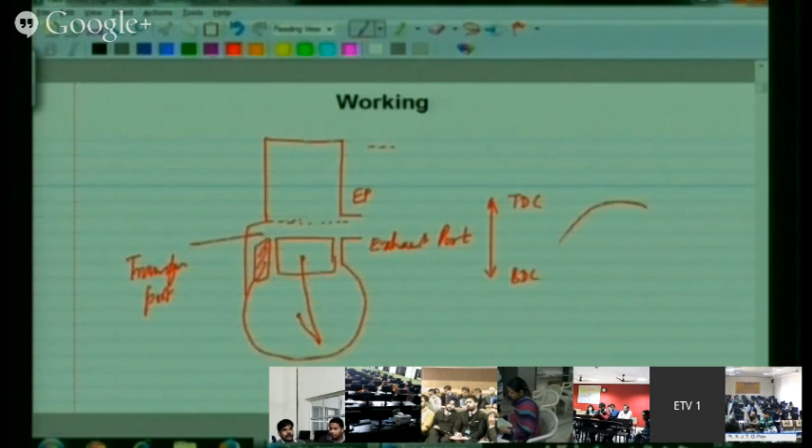Then the piston comes down. It first opens the exhaust port. So if I were to draw the port timing diagram of this engine, if this is top dead center and this is bottom dead center,

When the piston comes down, it first opens the exhaust port. We call it EPO. So as the piston comes down, it first opens this exhaust port. Then after some time, it opens the transfer port. We call this TPO.

And then symmetrically, it first closes the transfer port and then closes the exhaust port. EPC and TPC are exhaust port closure and transfer port closure. So this is the sequence of events that you see in a two-stroke engine.

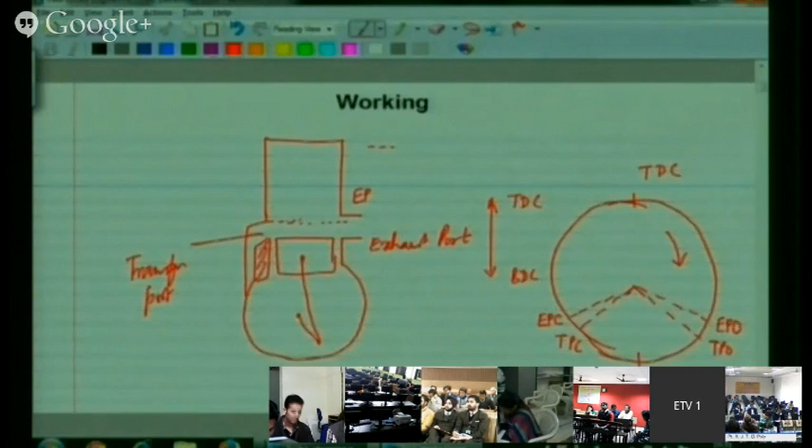So when the piston moves down from top dead center to bottom dead center, you have hot gases pushing the piston down under pressure. The piston moves down, first it opens the exhaust port. And the moment it opens the exhaust port, the exhaust gases rush out, and we call this the blow down process. So exhaust gases rush out of the cylinder and the pressure falls.

And meanwhile, if you look at what is happening in the crankcase, the pressure of the crankcase is going up because the piston is just compressing whatever is there in the crankcase.

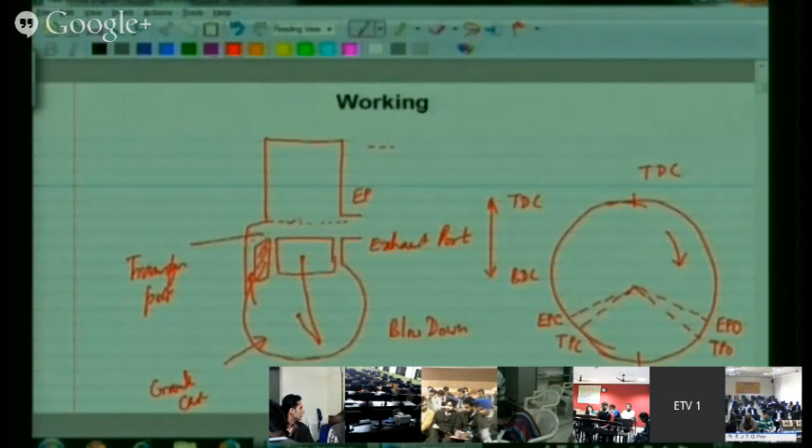And after some time, when the piston moves down beyond the transfer port's topmost point, you find that the transfer port opens. When the transfer port opens, the compressed fresh charge, which was taken earlier, is pushed into the cylinder through this passage, and the exhaust gases are also leaving out through the exhaust port.

So we have what is called a loop formed in the cylinder, the fresh charge coming like this, and the exhaust gases going like this. The fresh charge comes like this from the crankcase, pushing the exhaust gases out, and we call this process the scavenging process.

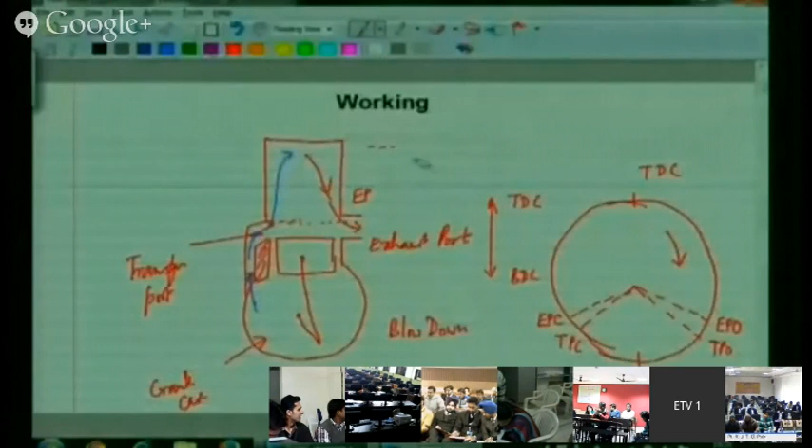So scavenging is basically removing the exhaust from the cylinder and filling the cylinder with fresh fuel air mixture. Now the fresh fuel air mixture comes from the atmosphere.

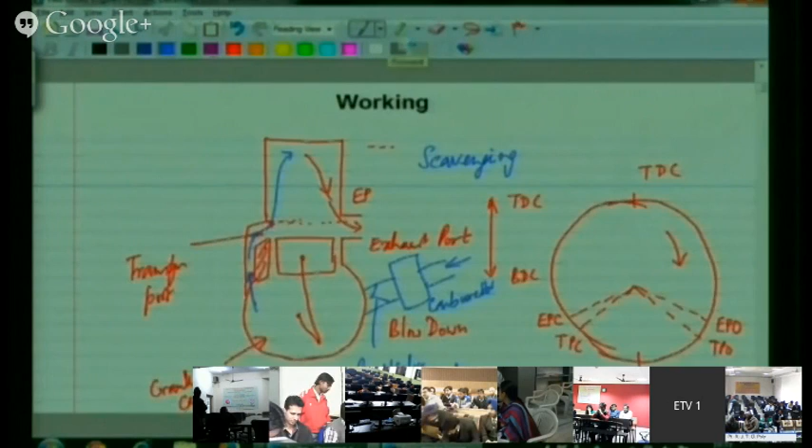Of course, you have what is called a reed valve or a one-way valve, which is supposed to allow the fresh charge from the atmosphere into the crankcase. And you may have a carburetor here, and air comes from the atmosphere, fuel also comes here, and air and fuel get into the crankcase through this reed valve. Reed valve is one method of allowing the fresh fuel air mixture into the crankcase.

So now let me repeat: when the piston moves up, the pressure at the bottom of the piston drops. So fresh fuel air mixture comes from the atmosphere through this reed valve, and then picks up fuel from the carburetor and enters into the crankcase. And meanwhile, on top of the piston, you have compression of the gases being done. The piston reaches top dead center, there's a spark on top, and combustion occurs in the regular way.

Then piston moves down, the exhaust port opens first, and we have what is called blow down, which occurs first. Then the transfer port opens and the fresh charge comes inside and pushes the exhaust out. This process is called scavenging. Meanwhile, as the piston is moving out, we are taking fresh fuel air mixture through the carburetor once again. So this cycle keeps on repeating.

And if you look at this portion where the exhaust port is open and the transfer port is not yet open, this we call the blow down process. And this we also call exhaust lead. That is, the exhaust port actually leads the transfer port.

But what really happens at the end of the process is that the exhaust port closes after the transfer port closes. This is a problem. The exhaust port need not close after the transfer port closes. In fact, the exhaust port ideally should close even before the transfer port closes, because if it closes after the transfer port closes, whatever has been taken into the cylinder has a chance of going out of the cylinder, and short circuiting will be more.

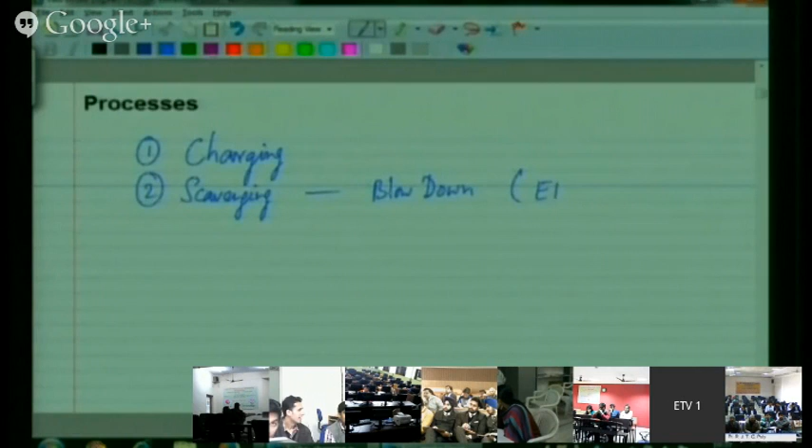So basically, the processes that we have seen in the two-stroke engine are charging, that is taking the fresh fuel air mixture into the crankcase. Then we have scavenging, and scavenging is composed of blowdown, where the exhaust rushes out between the exhaust port opening point and transfer port opening point.

And then you have the fresh mixture intake into the cylinder when the transfer port opens to transfer port closes, and this fresh mixture is pushing the exhaust out.

And then you also have what is called as the combustion taking place on the top of the piston. The pressure goes up and then the piston is pushed down. So these are the main processes that occur in the two-stroke engine.

This charging occurs into the crankcase, and the scavenging occurs in the cylinder. So, and we also saw that this charging is through the crankcase, so it is not very complete. We'll see very soon. And the scavenging is the one which leads to problems like short circuiting

and charge dilution. So these are the main problems, and these problems lead to high hydrocarbon emissions because short circuiting is fuel, and brake thermal efficiency is low, hydrocarbon emissions are high, and this charge dilution we'll see very soon will lead to rich mixtures. We'll need rich mixtures, and rich mixtures means the carbon monoxide emissions also will be high.

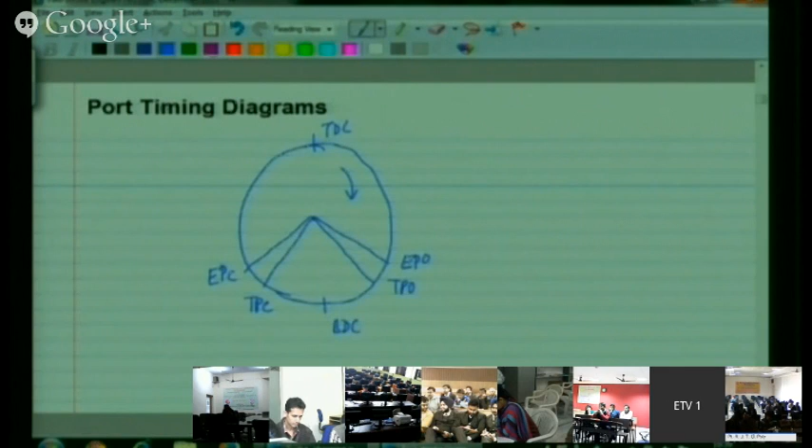And the port timing diagrams we saw already. I'll just repeat it once again. We have the exhaust port opening which opens first, then we have the transfer port which opens next, and symmetrically transfer port closes first and exhaust port closes next. If this is and this is top dead center, and this is bottom dead center.

So this is what we saw as a port timing diagram, and this we saw as the exhaust lead. And the exhaust lead is important because during the exhaust lead, the hot exhaust at high pressure from the cylinder has to go out and allow the fresh charge to come inside. So during the exhaust lead, the pressure in the cylinder has to fall from the cylinder pressure to the crankcase pressure.

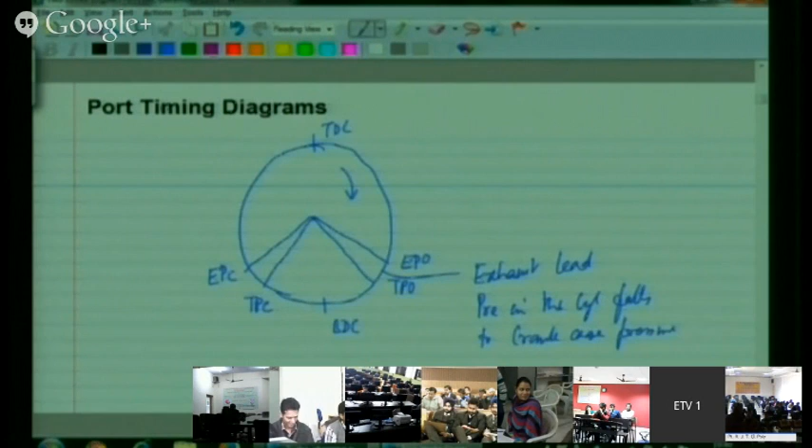So exhaust lead has to be given, and during this time the pressure in the cylinder falls to the crankcase pressure. So this has to happen. So if we need time for this, and this time is given by the exhaust lead. But this exhaust lead means that you are closing the exhaust port later than the transfer port, you get problems of short circuiting because of that. So these are the inherent problems in a two-stroke engine.

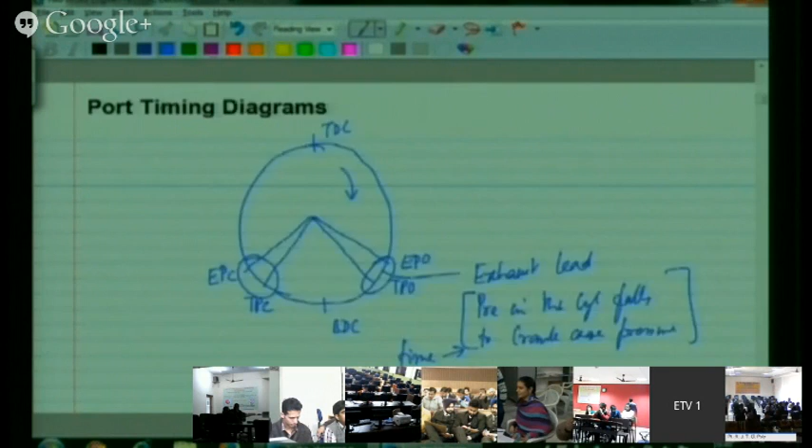Now coming to the charge in the two-stroke engine, if you look at the charge in the cylinder in the two-stroke engine, it will be composed of fresh air plus fuel. It will also be composed of the retained exhaust, and this is what we call as charge dilution. And this retained exhaust does not allow the fresh charge to burn well, and you're forced to use rich mixtures. So normally in a two-stroke engine, we are forced to use rich mixtures.

We are forced to use rich mixtures, and these rich mixtures also lead to CO emissions.

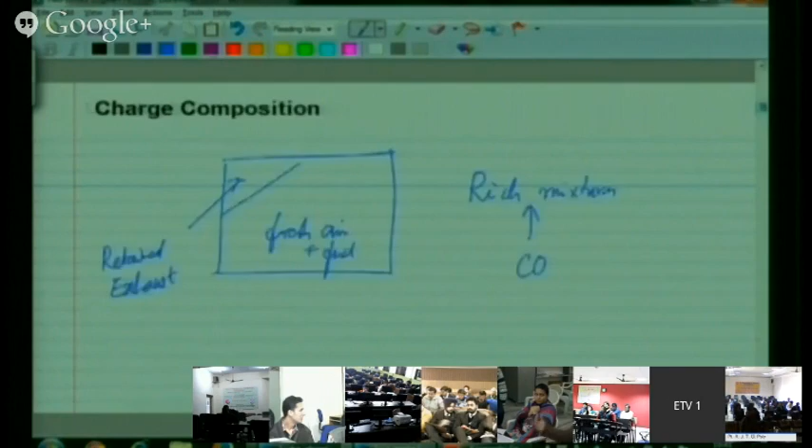Now coming to the lubrication of the two-stroke engine. We know in a four-stroke engine we can always put lubricating oil in the crankcase, and it will stay there. In the two-stroke engine, however, air coming from the atmosphere gets into the crankcase and then into the cylinder, so you cannot put lubricating oil in the crankcase. So we need other methods of lubricating the engine.

So we use what is called petroil lubrication, which means we mix the lubricating oil with the petrol which goes into the cylinder. We mix it in a particular fraction, something like 1 to 2% of the amount of fuel. So 1 to 2% of the fuel would be oil, mixed with the fuel and taken along with air and fuel into the cylinder. This fuel will get into the crankcase, touch all the moving parts of the engine, also go into the cylinder, touch the moving parts, and lubricate them.

And then this lubricant will be lost - so it is lost lubrication. So another problem with the two-stroke engine would be high lubricating oil consumption, and also emissions and deposits because of this lubricating oil.

So people have tried to reduce this problem by making use of oil injection. They don't mix the oil and petrol together in the same proportion. Instead there is a small oil pump which injects the required amount of oil into the air stream, and this small amount of oil goes into the cylinder and lubricates different parts. The advantage is that the oil to fuel ratio is not fixed here - it is varied depending on the operating condition. So this is a better system, uses lesser oil, and has brought down emission levels.

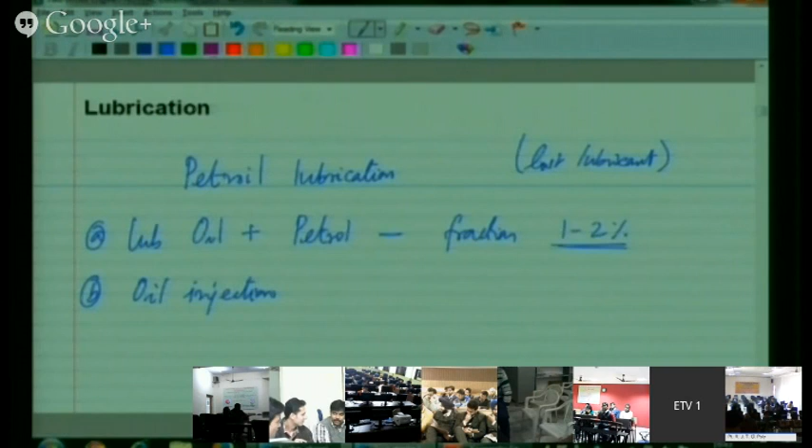Now we'll move on to the next thing, which is the PV diagram of a two-stroke engine. I'll try to link the PV diagram to the port timing diagram, so I'm drawing the port timing diagram at a slightly different angle here.

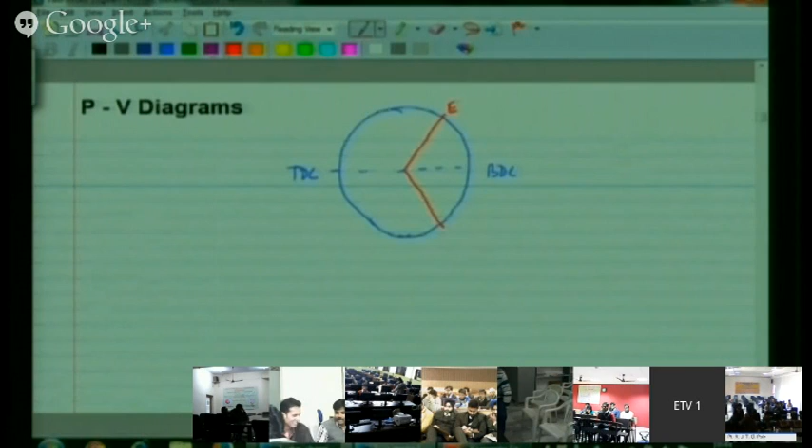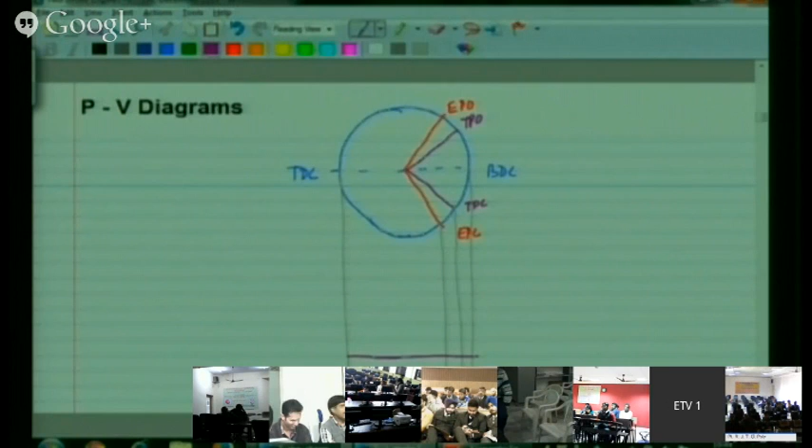This is top dead center, this is bottom dead center, and this is the exhaust port opening and exhaust port closing, and this is the transfer port opening and transfer port closing. And I'll just bring all this down.

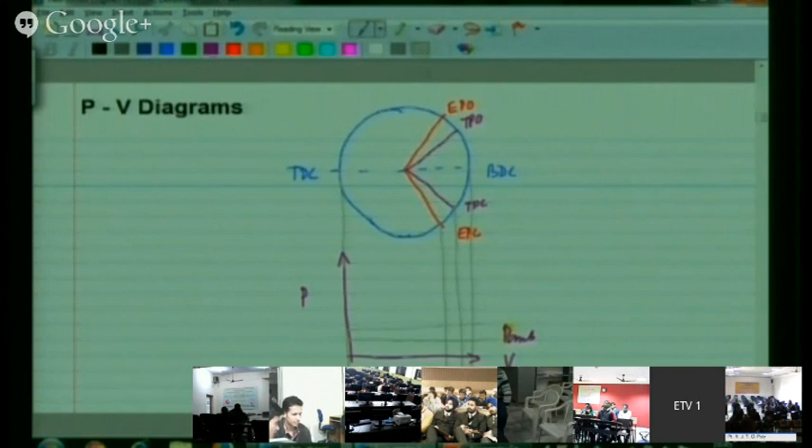So the x-axis represents volume and the y-axis is pressure. The TDC to BDC difference is actually the volume, and I'll try to plot the pressure changes. Here I'll show that this pressure is ambient pressure, and the pressure in the crankcase is actually slightly above ambient pressure. I'll call it PCC, the crankcase pressure.

Normally what happens is compression starts from a pressure which is slightly above the crankcase pressure, because the cylinder is likely to be filled at crankcase pressure. But it doesn't happen so, because the cylinder is actually exposed to the atmosphere during the start of the compression process, since the exhaust port is open.

So I'll just trace what happens as we come from the expansion process. Let us say we have started expanding from a high pressure - this is the expansion process after combustion. At this point, the exhaust port opens, and the moment it opens, we see what is called a blowdown.

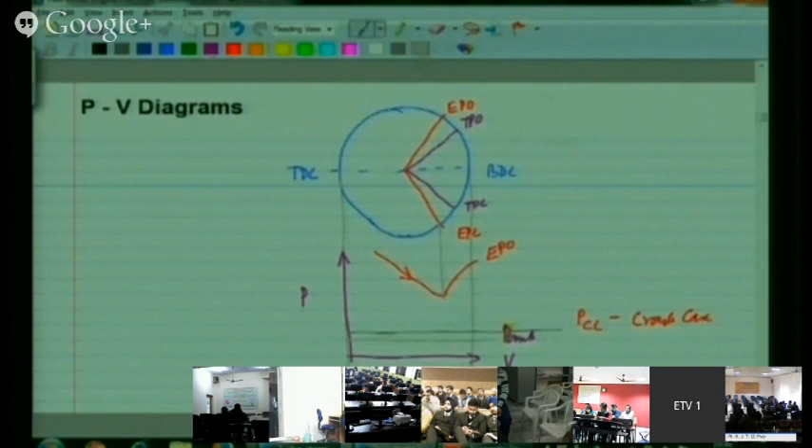So pressure significantly drops, and in fact we want this pressure to actually drop to the crankcase pressure, because unless it drops to the crankcase pressure we will not be able to open the transfer port. So we want this pressure to drop from here to the crankcase pressure, which is here - this is the pressure of the crankcase. So this process is called blowdown.

So the moment the exhaust port opens, there's a drop in pressure, and after this point the transfer port opens. Ideally when the transfer port opens, the pressure should be at least equal to the crankcase pressure or lower. After that, the pressure gradually falls down to nearly ambient pressure, because the exhaust port and transfer port are open.

So then the compression process starts from here, and till the exhaust port is closed, compression may not start at all, because you're still exposing the gases to the atmosphere. Compression ideally starts only after the exhaust port is closed.

So this becomes the compression process, and then you have combustion, and then you have your expansion. This point is exhaust port closing, this point is transfer port closing.

The point I want to make here is, when the exhaust port is about to open, the pressure in the cylinder is considerably higher than atmospheric. The moment the exhaust port opens, there is a sudden drop in pressure due to blowdown, down to crankcase pressure, and we want the pressure to fall to the crankcase pressure when the transfer port is about to open. After the transfer port opens, there is a further drop in pressure because the ports are exposed to the atmosphere. Ultimately at BDC we nearly reach atmospheric pressure.

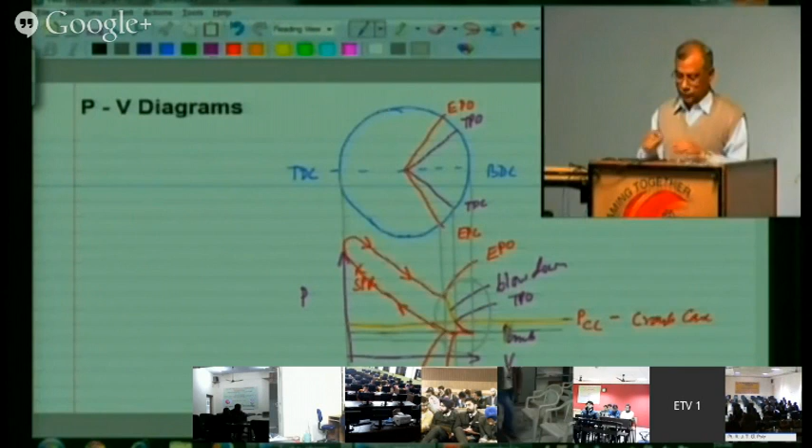There is some loss in power. This also means there is a loss in work, because you are forced to open the exhaust port earlier. This is typical of a two-stroke engine.

The other point to note is, you should give sufficient time between exhaust port opening and transfer port opening, so that the pressure in the cylinder at the point where the transfer port opens is equal to or lesser than the crankcase pressure. Otherwise the fresh charge will not flow from the crankcase.

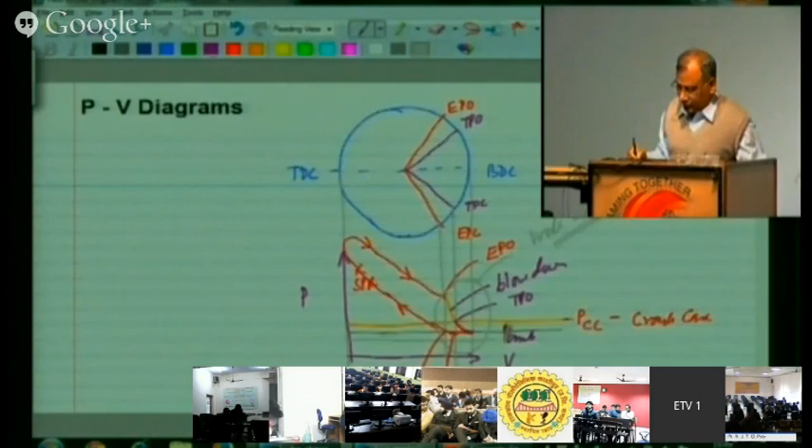Now I'll just quickly list some of the advantages of a two-stroke engine. The first advantage of the two-stroke engine is the high power to weight ratio. It has a very high power to weight ratio.

The second advantage is uniform torque, because every cycle, every revolution, you have a power stroke, so the torque is more or less uniform. Whereas in a four-stroke engine, the power stroke comes once every two revolutions, so there is a drop in torque, then it rises again, so the two-stroke gives more uniform torque.

Then the third advantage is you have low NOx emissions. This is because of charge dilution. Charge dilution is nothing but exhaust being retained inside the cylinder and mixing with the fresh air, and charge dilution is like EGR, exhaust gas recirculation. With charge dilution you find that your NOx levels automatically come down, because it is almost like exhaust gas dilution.

The other advantage of two-stroke engines is that it needs a small flywheel because the torque is more uniform. So the engine can accelerate quickly and decelerate quickly.

It is simple because there are no valves, easy to maintain because there are no valves, no complicated parts and things like that. It has fewer moving parts. Its friction is low, so it has got a high mechanical efficiency.

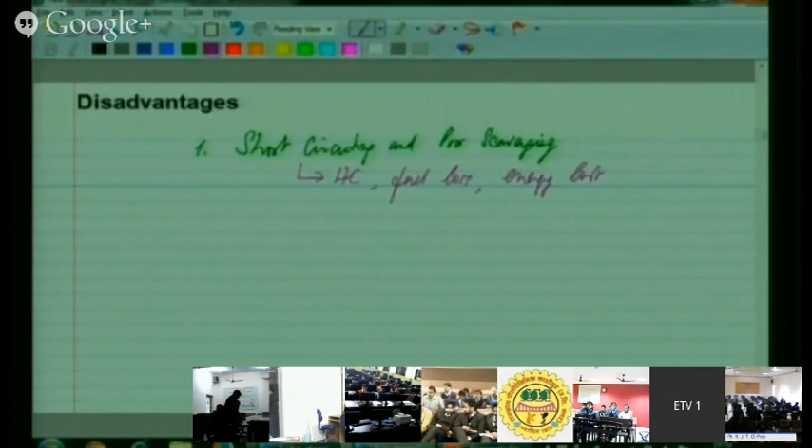Poor scavenging means charge dilution as well as short circuiting, which means that you are not able to push all the exhaust out from the cylinder and retain all the charge inside. So these are the main problems, and as a result, the thermal efficiency of a two-stroke engine will be low.

This is one of the biggest disadvantages. The second big disadvantage is that the HC emissions will be high. HC emissions are high because of short circuiting and also because of charge dilution. Short circuiting means directly HC goes out. Charge dilution means the fuel within the cylinder does not burn properly, and that also leads to hydrocarbon emissions.

The third disadvantage is that the temperatures in a two-stroke engine are high. Why is it that the temperatures are high? Because every revolution you have a power stroke, so the component temperatures become high. And we know that if the component temperatures are high, the engine could fail. One of the ways to avoid these high temperatures is to do good cooling.

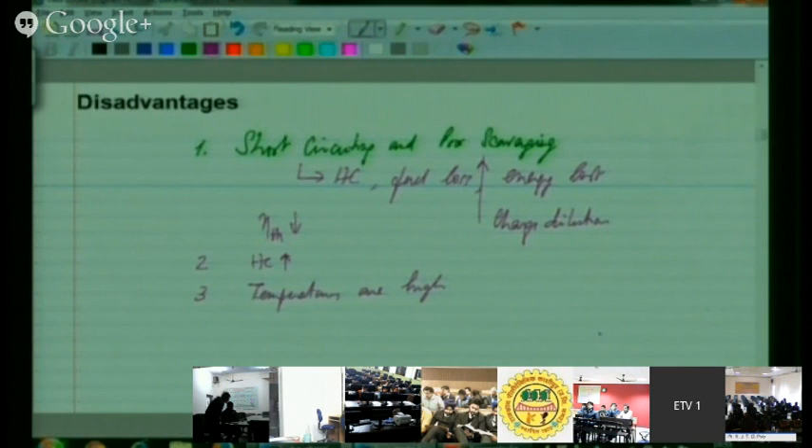But there is only so much external cooling you can do. So we do what is called internal cooling. Internal cooling is actually a vague term, but what we actually mean is using a rich mixture, that is, using more fuel than what is actually required.

When you take more petrol than what is actually required for combustion and power at that operating condition, this gasoline, when it vaporizes, picks up heat from the air because the latent heat of vaporization has to be supplied from the air with which it is mixed, and because of that the charge temperature falls. So you have charge at a low temperature, and this allows us to control the temperatures of the components.

So you use a rich mixture for internal cooling because the temperatures are high, and if we do not do this, the components will become very hot and the engine could fail. We call this rich mixture cooling or internal cooling, and this automatically leads to high carbon monoxide levels because the fuel cannot burn completely. It can also lead to high hydrocarbon levels. So this is another reason for high hydrocarbons and carbon monoxide.

The next problem which we face is that of knock and pre-ignition. Knock means that the charge inside the cylinder auto-ignites before the flame can go and actually allow it to burn, and this occurs because the temperatures become very high.

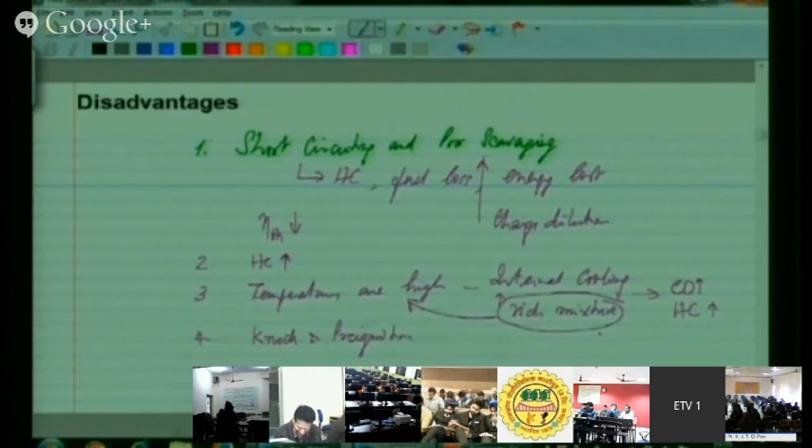Inside the cylinder, the temperatures could be very high because, as I already told you, it's developing one power stroke in every one revolution. So you could have knock occurring. You could also have pre-ignition, some hot spot in the cylinder which keeps on igniting the charge.

There are other issues as well, like high exhaust gas temperature. The two-stroke engine, as it runs, since the component temperatures are high, the exhaust gas temperatures are also high. And high exhaust gas temperatures mean that you cannot use a catalyst in the exhaust for after-treatment so easily, because the catalyst could get damaged.

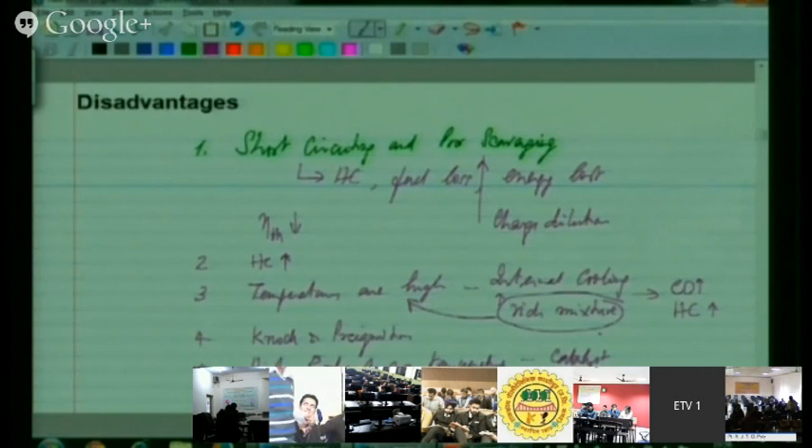Another problem with the catalyst is that the rich mixture which comes also means you need to burn a lot of fuel in the catalyst, and the catalyst temperature can go up. So it is difficult to use a catalytic converter in a two-stroke engine unless some special methods are taken.

So ultimately, I've just put some of the important disadvantages that we see in a two-stroke engine: fuel consumption, emissions. One point to note is that HC emissions are high at high loads because you're charging a lot of charge and it gets short-circuited. HC emissions are also high at low loads because charge gets diluted and doesn't burn properly. And CO emissions are high always because you're always forced to use a rich mixture. But there are advantages in terms of the operation of the engine, simplicity, and so on.

So what are the applications of the two-stroke engine? We already saw that small vehicles, and then vehicles which can be oriented in any direction, that is power tools.

Two-stroke engines incidentally can be tilted upside down and run because there is no oil in the crankcase.

Hybrid power packs, and also engines meant to work in cold climates like the snowmobile - here again two-stroke engines are good because of the simple lubrication system they use. So there are some applications, even aircraft, small aircraft, very small aircraft like remotely piloted aircraft and things like that, where two-stroke is a viable option.

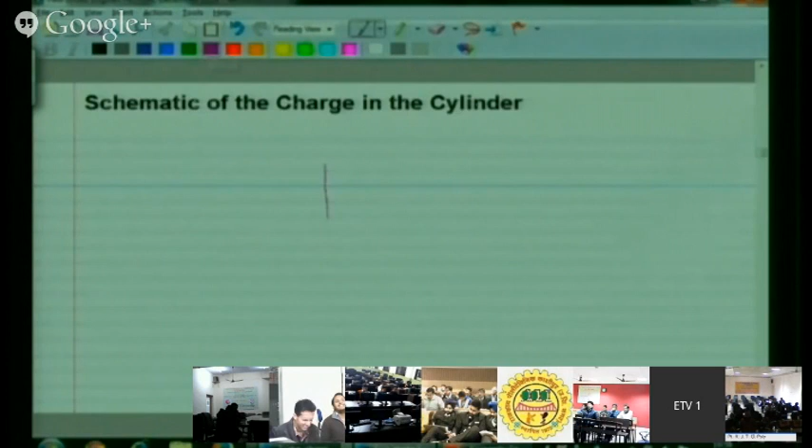Now the next thing I want to tell you is about what we actually have in a two-stroke engine. If I have to represent the two-stroke engine's charge, let me represent this as the two-stroke engine cylinder after the scavenging has taken place. This simply represents the volume of the mixture present inside the cylinder after scavenging has taken place.

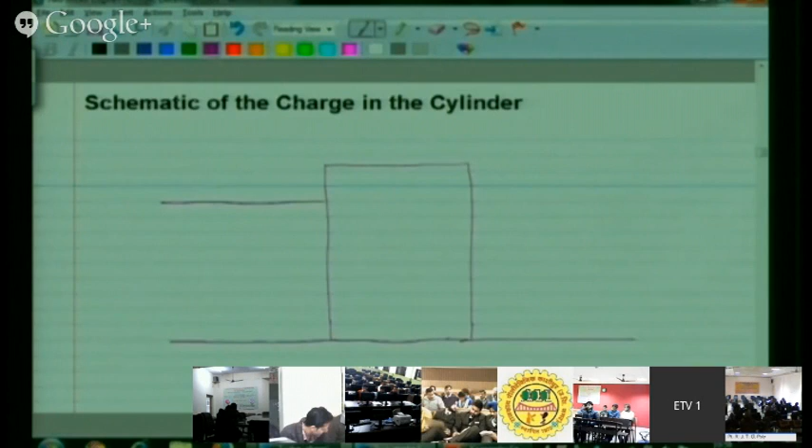So let us say the y-axis is proportional to the mass of what is present. During the scavenging process, let us assume that this much is what is entering - this is air being pushed through the transfer port into the cylinder, and I'll call this mass of air admitted, or MAD. It could be mass of air and fuel admitted also, if the air and fuel are mixed together.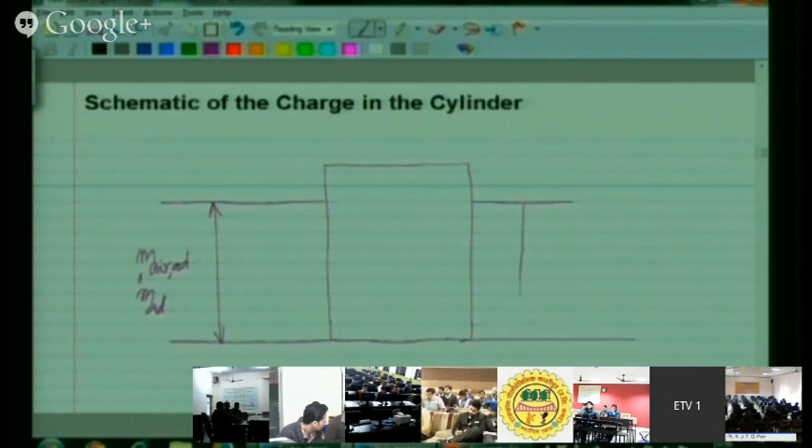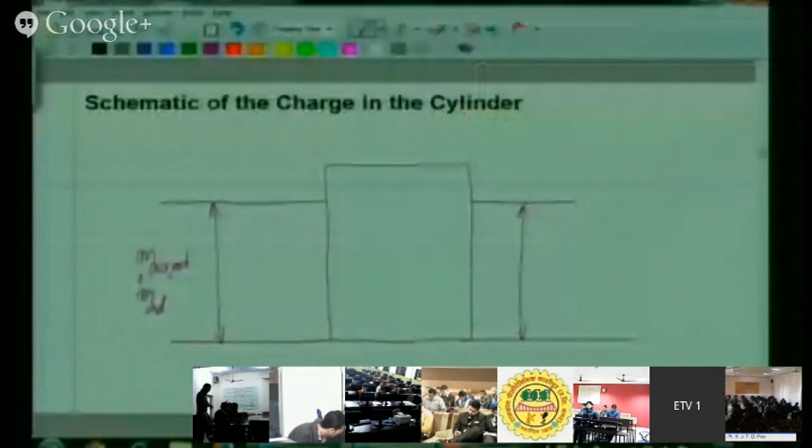Under steady operating conditions, what you push into the cylinder is what comes out. So the same M admitted amount should come out, but it will not be air that comes out - it will be exhaust. So M exhaust out equals M admitted - that much exhaust should come out. But it may not be only exhaust, it can also be exhaust plus air, and this is the total mass in the cylinder.

The mass in the cylinder will be higher than the mass admitted into the cylinder, because the mass in the cylinder depends on the total volume of the cylinder and total density of the charge present, whereas the amount of air you send into the cylinder depends on the throttle position. You can send a small or large amount of air, and whatever you send inside is what will come out. So inside the cylinder you will have fresh charge and also some exhaust.

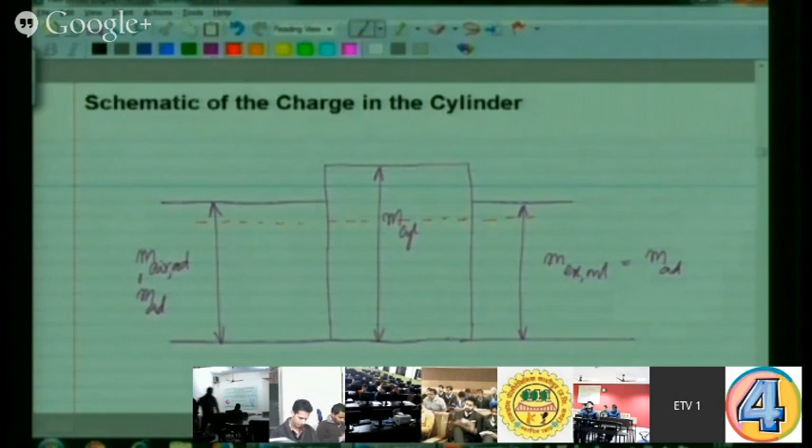Now, out of the air that you admitted inside, some amount may simply go out. So you admitted some amount, and this amount that simply escapes we call mass of air short circuited. It just went into the cylinder and escaped because the exhaust port and transfer ports are open together. So if this is escaping, what is trapped inside the cylinder is only this much - mass of air that is trapped in the cylinder.

Okay, so that is what we see here.

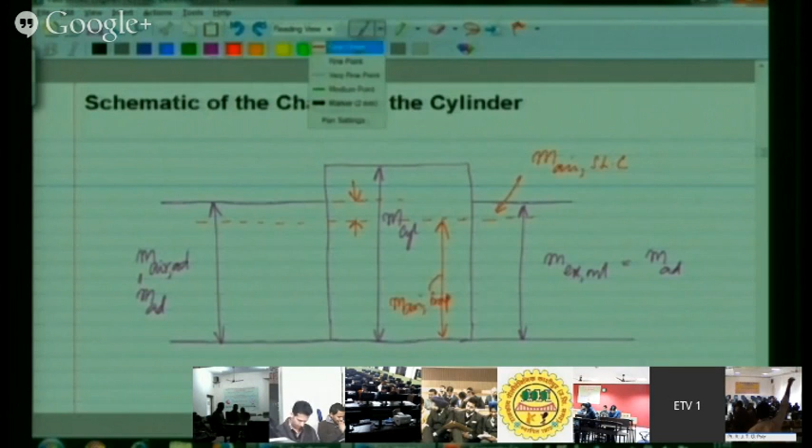So what I wish to say here is that not all the air sent into the cylinder is trapped. Only part of the air sent into the cylinder - this is M air - is trapped in the cylinder, and the remainder is exhaust retained from the previous cycle which has not gone out. So what comes out of the cylinder, M exhaust out, partially contains exhaust, and then this portion is the air that is short circuited. This is what we should remember.

With this, we will get to some terms that are normally used in scavenging.

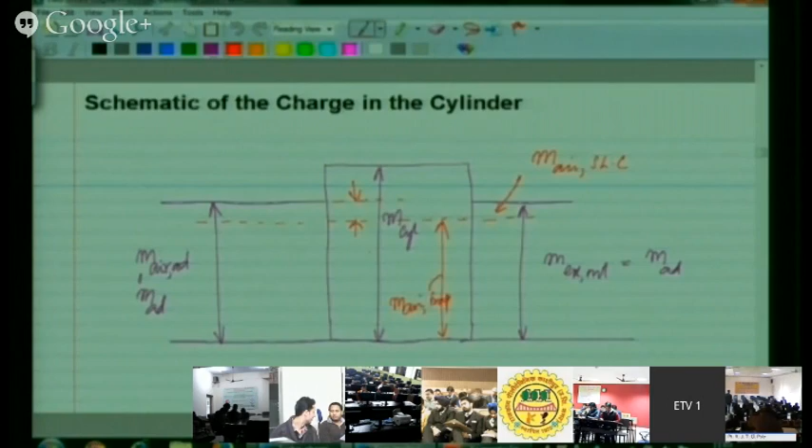So we'll now go back to the terms, as I told you: the same previous thing, where we have some fresh air coming in, some exhaust going out equivalent to that, but the exhaust going out contains both fresh air and mostly exhaust that is actually being scavenged. So the exhaust going out is not pure exhaust - it has some fresh air, and in the cylinder you have some exhaust being retained and some fresh air also being retained. With this background, let us relate to some of the terms actually used in scavenging.

So the first important term is the reference mass. We need to relate everything to a reference mass, and this reference mass is nothing but some reference volume multiplied by the density of the mixture. The density of the mixture is the air-fuel mixture we are allowing into the cylinder, and this reference volume could be whatever we define, because it is an accepted reference volume.

For example, this reference volume could be V displacement, or it could be V cylinder - the entire cylinder volume, or only the displacement volume. So the reference mass is calculated as V reference into rho mix. Now we also have an important term in two-stroke engines, which is the delivery ratio.

This is a delivery ratio. This delivery ratio is defined as the mass of air delivered by the M reference, and it is normally given as M delivered by M reference. This M reference is nothing but the displacement volume of the engine into density of the mixture. So this is what we call as delivery ratio.

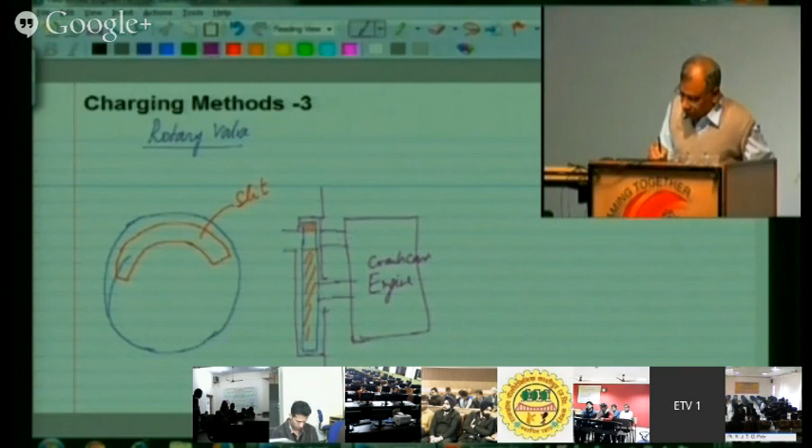I'm only drawing a schematic. And let us say that this disc is enclosed on both sides. And this output is fed to the engine. So this is the crankcase. So this output goes to the crankcase. So what happens is when the slot, this is an intake pipe, this is the pipe which goes into the crankcase.

When the hole in the disc is in line with these two pipes, there is a communication from the atmosphere into the crankcase. And if the disc rotates and this portion comes here, then nothing can flow into the crankcase. So as the disc is running along with the engine, the slot will get exposed and both pipes, the one going to the crankcase and the one coming from the atmosphere, may be connected through the disc valve. And when the slot moves out, the disc valve obstructs this connection.

So it means that the disc valve can open and close the connection to the crankcase whenever it is required. The actual arrangement may not be like this, it's only a schematic. In the actual arrangement, this pipe is not there, the disc valve is directly on the crankcase. But this is just a schematic.

In this case, you can make the disc valve open wherever you want and close wherever you want. So if this is BDC and this is TDC, you can make the disc valve open like the reed valve somewhere here, and close it also like the reed valve somewhere here. Though this is linked to the engine, it is not linked to the piston, it is linked only to the disc valve. So you can cut the slot in such a way that the disc valve opens here and closes here, and this rotating part of the valve can work the way you want.

The main advantage with the disc valve is that the timings are unsymmetrical, whereas if you look at the piston control ports, the timings are symmetrical. The second advantage of the disc valve is that there is no reed valve, so there is no pressure drop. So this is perhaps the best arrangement for volumetric efficiency. But it can work well only at one speed. It cannot work at all speeds, because at other speeds you want to change the timing and it cannot change. Whereas the reed valve is not the best arrangement for any speed, but for all speeds it works well, because it keeps on adjusting itself for different speeds.

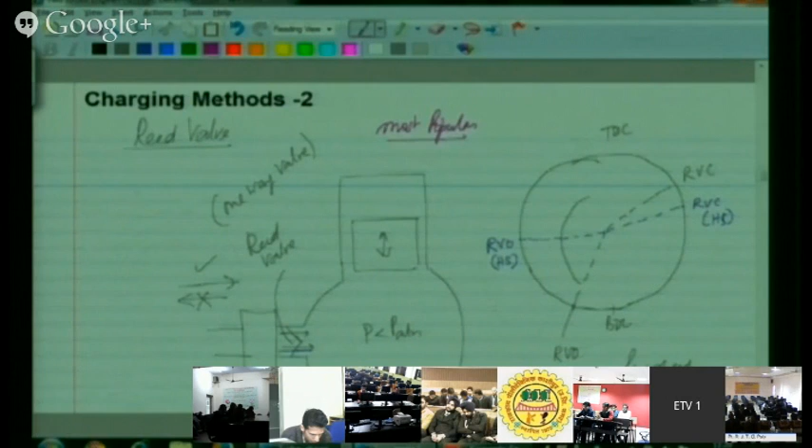So this is the most popular, and all two-wheelers and small engines make use of this arrangement. But the disc valve can give you the highest power, because it can give you a lot of air, but it can give the highest power only at one speed, the speed for which it is designed. So this is how the disc valve, the rotary valve, and the reed valve work, and this is how they perform.

So next we will move on to the scavenging methods. Now we already saw what is scavenging. Scavenging is nothing but removing the exhaust from the cylinder during the blowdown period and putting fresh fuel air mixture into the cylinder and pushing the exhaust out, and in the process not losing any fresh charge through the exhaust port. There are different methods of scavenging.

The first method of scavenging is what is called cross scavenging, where I am now not going to draw the crankcase, I am going to draw only the portion above the piston, because that is what is relevant for scavenging. This is the exhaust port, I'll call it EP, and then you have the transfer port, located below the exhaust port. The bottom level portion of the transfer port and the exhaust port are at the same level, but at the top level, the exhaust port is above the transfer port, and we call this the exhaust lead in terms of angle. When we convert it to angle, we call it exhaust lead. So this sort of arrangement is called cross scavenging, because these two ports are opposite each other.

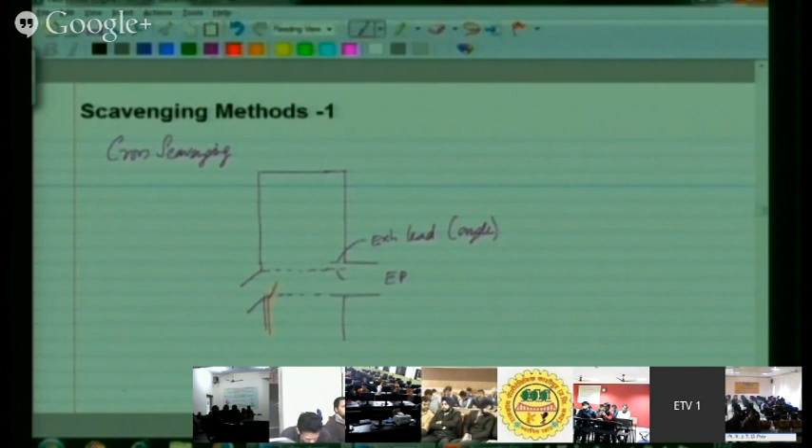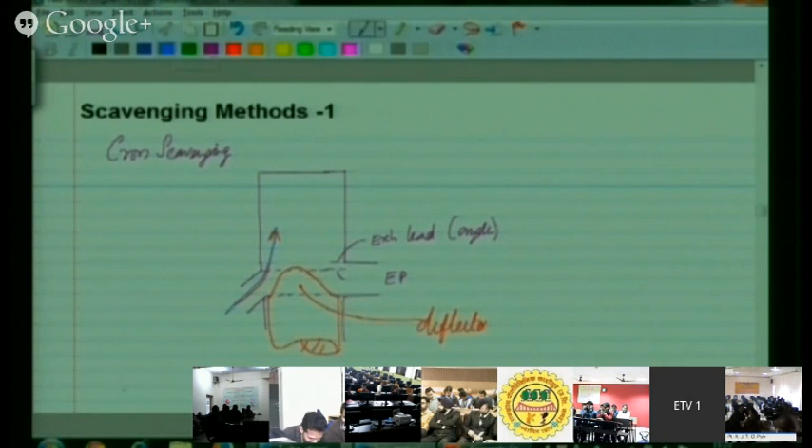So in this case, the piston we use has to be slightly complicated, because it should not allow the fresh charge to directly go into the exhaust. So the piston we use may be something like this. It will have what is called a deflector. The deflector allows the fresh charge to go up - I'll draw the fresh charge in blue - and allows the exhaust to go down like this. This is exhaust, this is fresh. So it sort of tries to separate these two out, so that the fresh charge will not directly go out. The deflector controls this.

But you have problems with the deflector. The deflector is heavy because it's a mass on the piston. The deflector becomes hot, and even though you have the deflector, there is some chance of direct short circuit of the fresh charge through the exhaust port. But this system is simple, and in many very small engines this system was adopted, but it is almost outdated now. It is not used in two-wheelers. This is simple but not very effective. It is called cross scavenging. The next method, which is very effective and widely used, is what is called loop scavenging.

The loop scavenging method is the one which is most popular in all small vehicles. And in the loop scavenging engine, I am going to draw the plan and elevation of this arrangement. Otherwise, we will not be able to make out.

So this is the plan view of the cylinder, and I'll draw the elevation of the cylinder. And as usual, we have the exhaust port somewhere here, and the transfer port. So the exhaust port, if you see here, it is somewhere here, that is shown at the elevation at the bottom, and the transfer port is actually here.

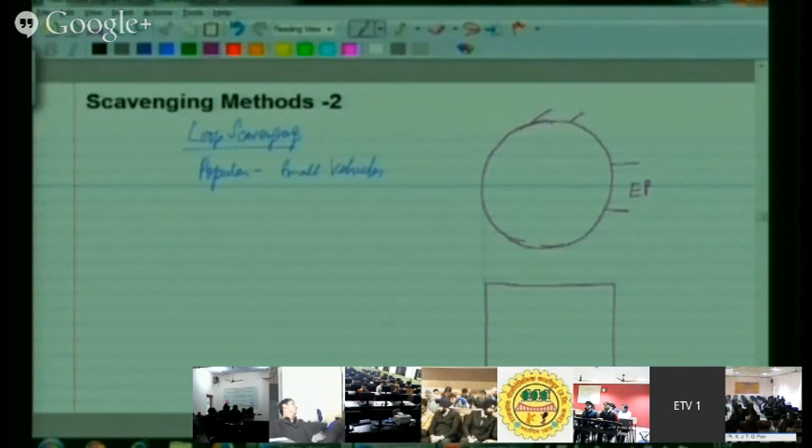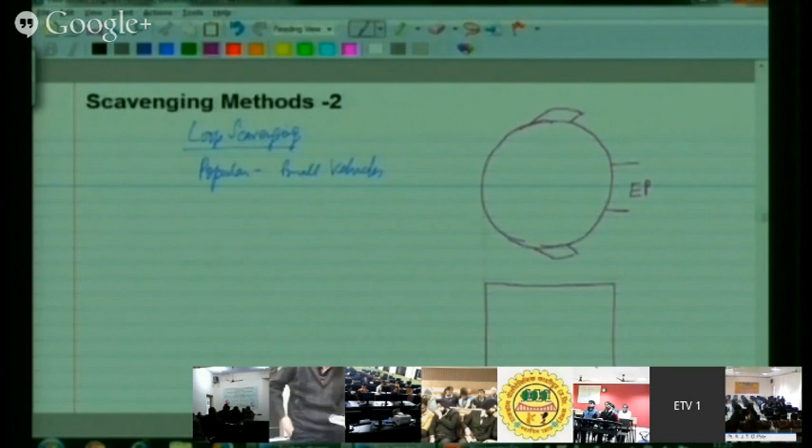If you see the cross scavenging arrangement, this is the transfer port, and this is the exhaust port. Transfer port is in front of the exhaust port, whereas here it is on the sides of the exhaust port. So the transfer port basically is located somewhere here. This is transfer port 1 and 2. So you have the two transfer ports somewhere here, and the cylinder head is slightly curved.

So what you find is that the fresh charge from the crankcase, shown in black here, will come like this into the cylinder, meet somewhere at this point. The two jets will meet. That means they'll come like this, meet somewhere, and then form a loop. And the exhaust will, in the meanwhile, be going like this. So this is why we call it a loop scavenging arrangement.

So the fresh charge is directed against the exhaust. It is not directed towards the exhaust. This is a very big advantage. So direct short circuiting from here is less. You don't have too much of direct short circuiting. You get very high scavenging efficiencies with this arrangement.

And the piston is flat because it is not deflecting the charge. So it's a simple piston. The port is complicated. Sometimes we may have additional transfer ports as well. You can even have 5 transfer ports all located on these sides, but the aim is to direct all the fuel air mixture away from the exhaust and form a loop which will push the exhaust out. So this is the best method and gives you the highest possible scavenging efficiency in small engines.

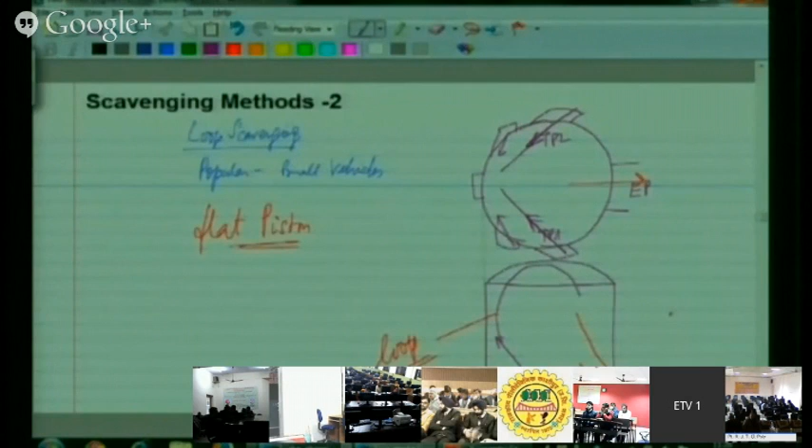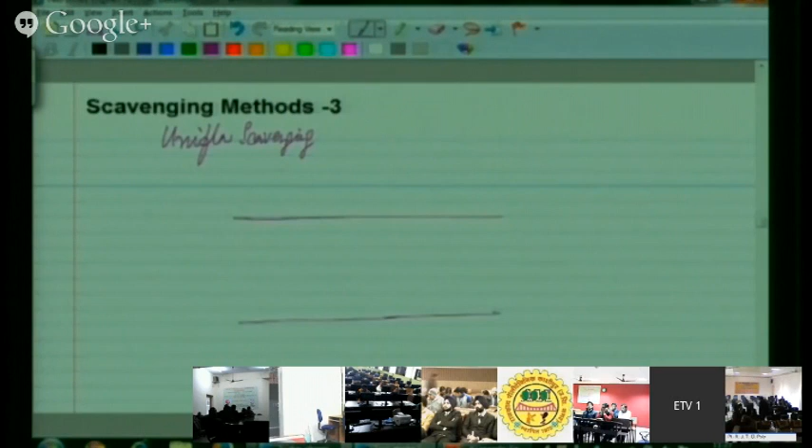The third method is what we call the uniflow scavenging method. I'll draw the engine in the horizontal direction. The uniflow scavenging method is simple. There are many ways of getting the uniflow scavenging arrangement, and one such method is this, which I am showing.

You can have 2 pistons. This is basically for large engines. You can have 2 pistons, and both these pistons are connected to their own crankshafts. So this is what we call an opposed piston engine. The crankshafts may be rotating in opposite directions. The pistons are moving back and forth.

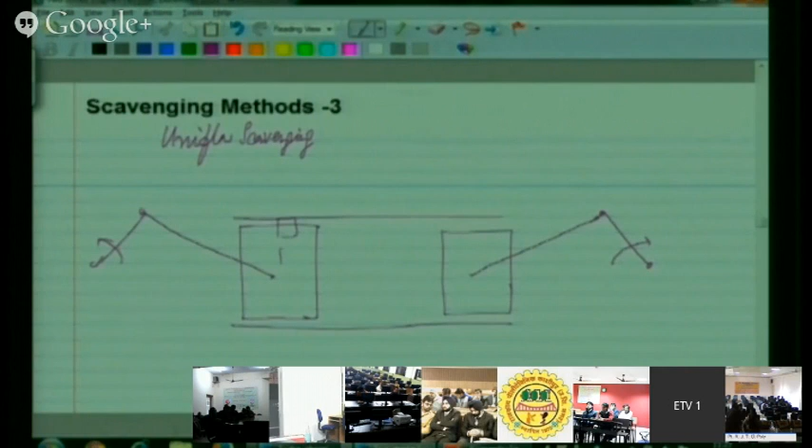On one side, you may have ports which are called... on this side you can have ports on the cylinder, and on this side also you can have ports on the cylinder. This piston opens these ports, this piston opens these ports. So as the pistons move apart, when they go to bottom dead center and top dead center, one set of ports is opened by one piston, the other set by the other piston. So this could be the intake or the transfer,

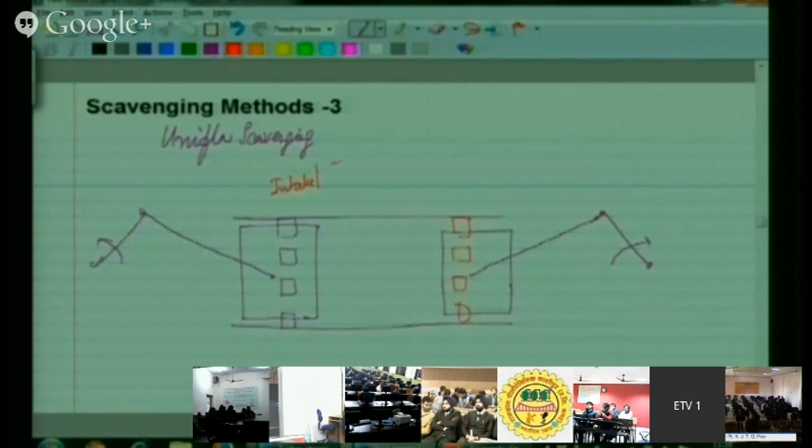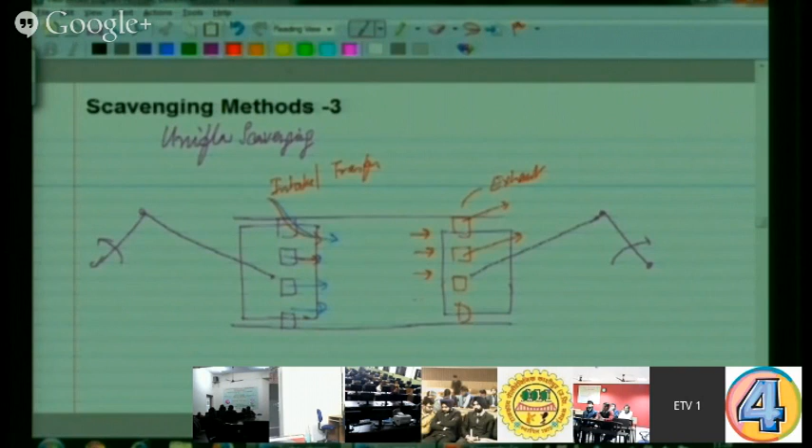and this could be the exhaust. So what happens is, when the exhaust port first opens, the exhaust gases go out like this, and when the intake opens, fresh charge comes like this, and the exhaust goes like this. So in the cylinder you have flow in one direction, and we call this the uniflow scavenging.

This obviously is for big engines where you need to have 2 pistons and 2 sets of ports and all that. But even in small engines you can achieve this by using valves. So you can have a valve on the top, and you can have ports at the bottom, and these ports can be fed with fresh air, and this could be exhaust. So when the piston moves down, if it has come somewhere here, fresh charge can come like this, and the exhaust can go like this.

So the exhaust gases can go out on the top, and fresh charge can come from the bottom - this could again be uniflow. Only thing is a 2-stroke engine which also uses a valve, so it's more complicated. Such engines are also there, they can be for big engines, and there are also smaller engines which work like this.

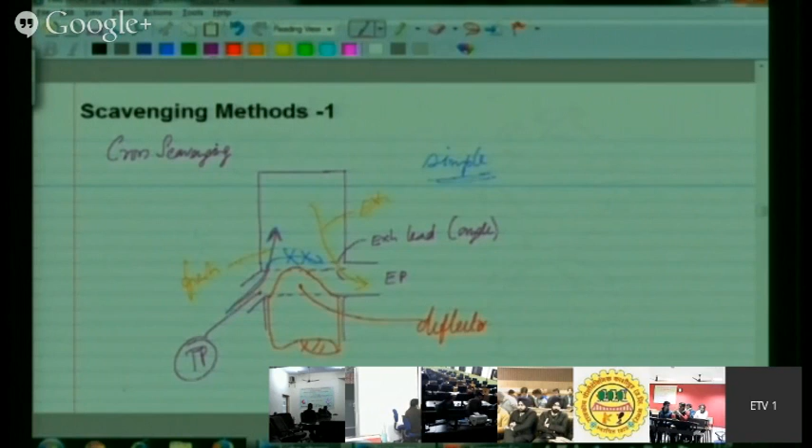But this is the best method of scavenging, because the fresh charge and the exhaust do not mix - they are moving in the same direction. So you have loop scavenging, which is best for small engines. You have uniflow scavenging, which is best overall, but only for big engines. And you also have cross scavenging, which is good for very small engines and low cost applications, but it is no longer very popular. So these are the different scavenging arrangements.

So before we move further to developments in 2-stroke engines, we can take another 10 minutes. I just thought I'll show you some performance parameters, how a 2-stroke engine performs. The main problem is scavenging.

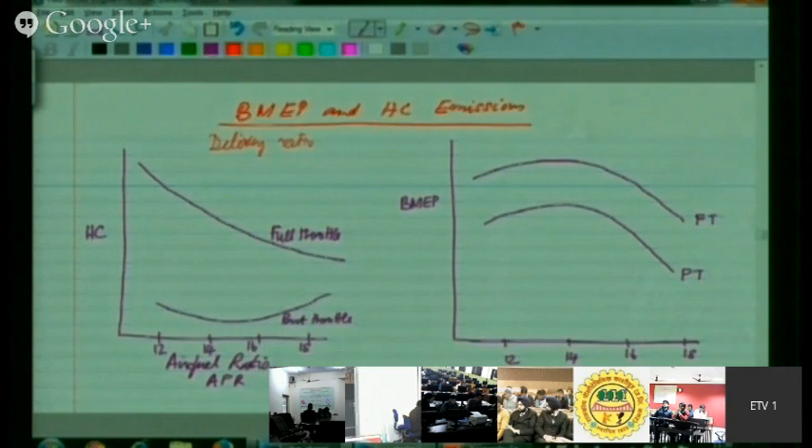During scavenging you have fresh charge going out of the exhaust, which means hydrocarbon emissions in a 2-stroke engine will be high. I also told you about delivery ratio, and delivery ratio is like volumetric efficiency of a four-stroke engine. That means if you have a high delivery ratio, you are sending more charge into the cylinder.

How do you control the delivery ratio? By the throttle. If you open the throttle of a two-stroke engine, you send more charge into the cylinder, delivery ratio goes up. If the delivery ratio goes up, more charge goes into the cylinder and the exhaust is pushed out properly. But if more charge goes into the cylinder, more charge will also go into the exhaust. So at full throttle performance, delivery ratio is given the symbol L. When delivery ratio is high, more charge will also go through the exhaust - it pushes the exhaust well, but it is also going out. So the amount of charge that goes out through the exhaust depends on delivery ratio.

When delivery ratio is very small, you put a very small quantity of charge into the cylinder that doesn't go out, so hydrocarbon emissions are low at part throttle. Hydrocarbon emissions are high at full throttle. Combustion is definitely better at full throttle, but still hydrocarbon emissions are high because at full throttle, short circuiting is very high. Somewhere around stoichiometric conditions, hydrocarbon emissions are minimum at part throttle because combustion is good there. If you make the mixture rich, combustion is bad; lean also, combustion is bad - hydrocarbons appear at part throttle. Whereas at full throttle, hydrocarbon is mainly dominated by short circuiting, so it is always there.

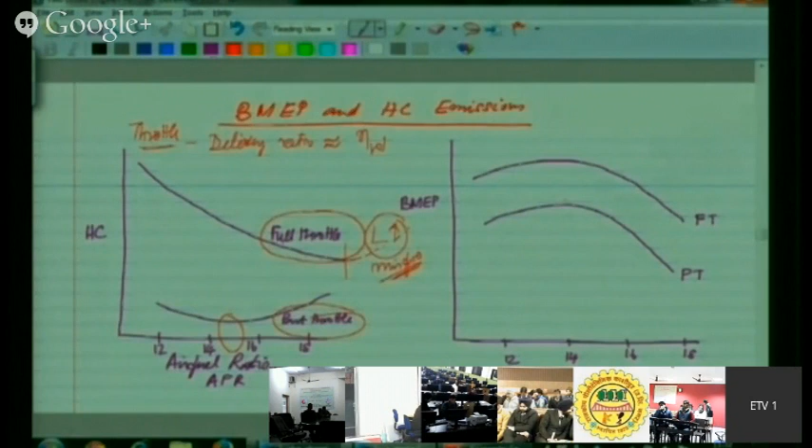If you look at BMEP, it's nothing but a representation of torque divided by displacement volume. You find that BMEP at part throttle is less than full throttle, and BMEP peaks close to rich mixtures, around 14:1 air fuel ratio, which is slightly rich for gasoline. It's around the same value for full throttle but slightly leaner, and in both cases it peaks around rich mixtures - full throttle BMEP is obviously higher than part throttle BMEP because you send more fuel.

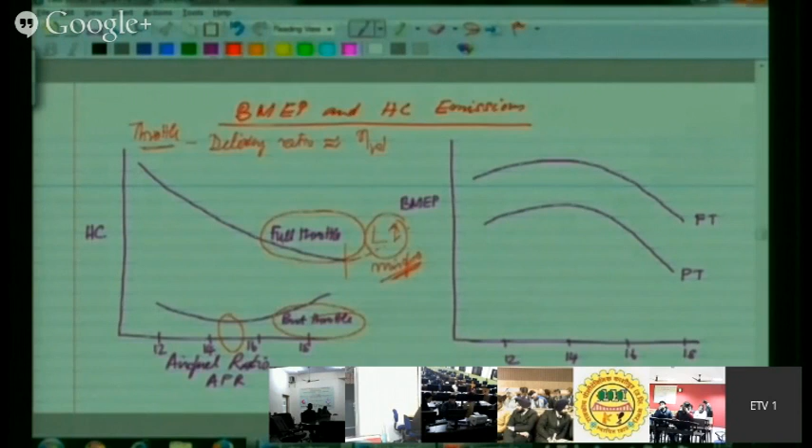So this is what we see. I'll now move on to some of the important aspects of two-stroke engines. We'll come back to this depending on the time that we have.

So what are the methods by which we can improve a two-stroke engine? What are the current methods? If I have to summarize the problems, we have dilution and short circuiting as the main problems of two-stroke engines. Short circuiting and dilution both can be controlled by improving your scavenging process, but there is a limit because there are so many constraints on scavenging, like port orientation.

So people are now adopting different methods to improve a two-stroke engine. What they are resorting to is direct fuel injection. That means you inject the fuel directly into the cylinder after all the ports close. If you look at the first figure we had, after the piston moves and closes the ports, only air is trapped, with the piston somewhere here.

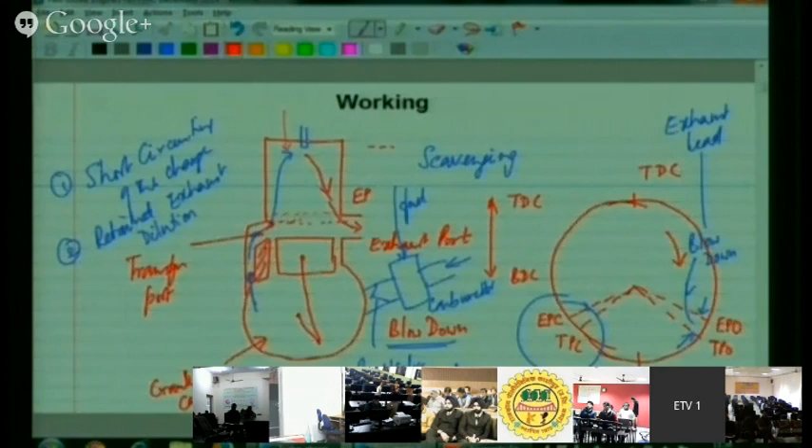That means to run the engine, you don't have a carburetor. You only allow air through the crankcase. This air goes into the crankcase, goes inside, and scavenges. Even if it is short circuited, only air will be short circuited. Then when the piston moves and closes the ports, you have only air inside the cylinder, and you inject the fuel into it. This is what we call direct fuel injection. It is the best method to avoid short circuiting because there's no fuel mixed with air—air alone gets into the cylinder and scavenges, while fuel is directly injected into the cylinder. This is a straightforward method, and sort of a sure method.

But when you really apply this direct fuel injection in an engine, you find there are problems. It is not as straightforward as it appears, because of the inherent difficulties in running it in an engine.

The first difficulty in direct fuel injection is the time available. You are going to inject the fuel after the piston crosses the exhaust, and the piston is somewhere here—it has crossed the exhaust and transfer ports and is moving up, and at this point you want to inject the fuel into the cylinder.

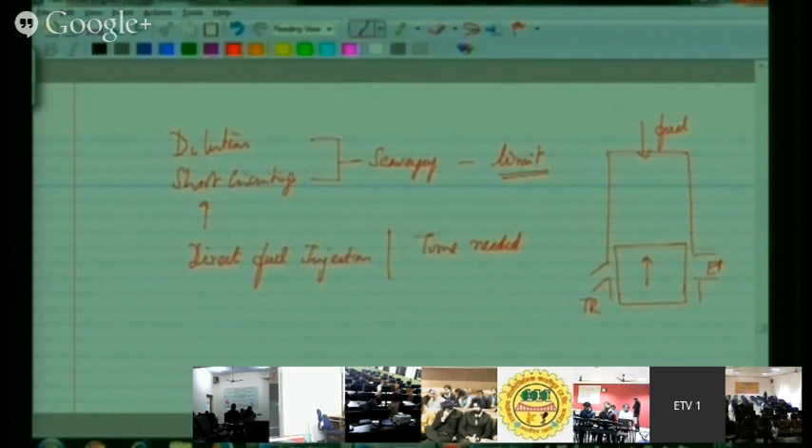When the exhaust port closes, the piston would have already crossed about 60 degrees after BDC—that is, the piston has moved up already by 60 degrees, and compression ends at 180 degrees. That means you have only about 120 degrees of compression, and in that short time you have to inject the fuel, mix the fuel and air, and then prepare it for combustion. So it becomes very difficult.

So the main problem with direct injection is the time available. The other problem in a two-stroke engine is that speed is very high—it can go to high speeds, even 10,000 or 12,000 RPM easily. And then the time becomes even shorter.

So in direct injection, you want to inject the fuel after the ports close, but you may not be able to do it after the ports close because you have very little time. So even though you want to do it after ports close, you may end up injecting it even before the ports close. This is one of the fundamental problems with direct injection. But direct injection definitely can avoid short circuiting to a very large extent.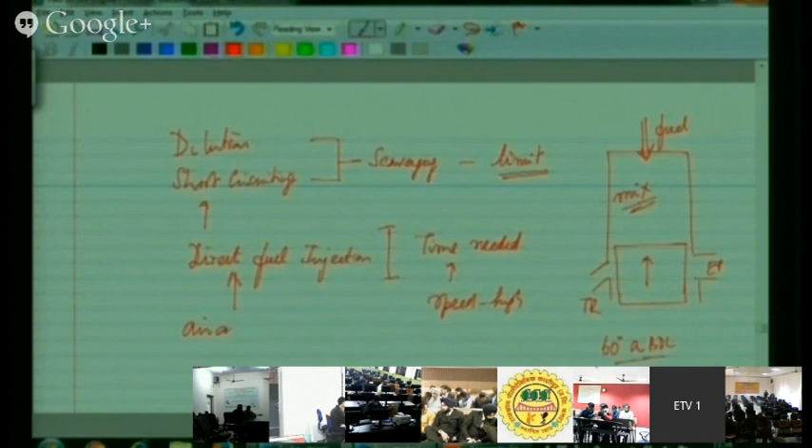So how do we reduce this time, or how can we inject in a very short time? In that short time, we want to both inject the fuel and mix it with air. One way to control this is to use air assisted injection. That means you don't inject fuel only into the cylinder—you inject fuel with a blast of air. This blast of air atomizes the fuel well, and a rich fuel-air mixture gets into the cylinder.

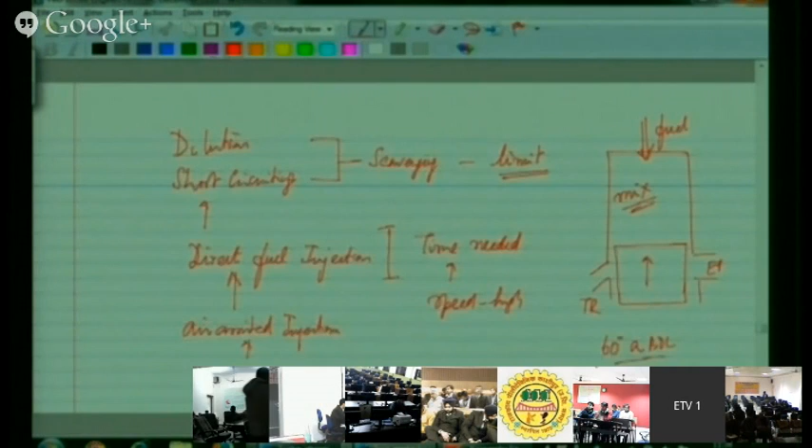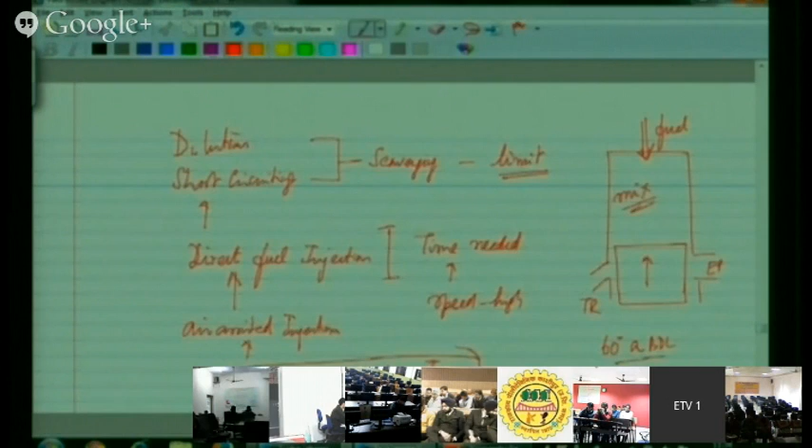This can mix easily and burn, so you don't need to have too much time for mixture preparation. So you can reduce mixture preparation time by going into what is called air assisted injection, and that's what I want to show you here.

So these kinds of two-stroke engines, I won't say they are becoming popular, but they have been around for the last 15 years or so, and in some applications they are popular. In small two-wheeler scooters they are popular, and even in India there are some companies which try to experiment with them and implement them on auto rickshaws, and some auto rickshaws are even now running with this.

So there are basically two injectors: one is the fuel injector, and the other one is the mixture injector. These are all timed to work together, so you have air assisted injection. With air assisted injection, the main benefit is you don't have to have a lot of time for mixture preparation because air is used to atomize the fuel.

And the other thing is you have low pressure injection. The fuel pressure can be about 5 to 7 bar, that's all. Whereas if you look at direct liquid fuel injection, fuel pressure can go even to 100 to 200 bar. So this is a low pressure operating system suitable for small engines.

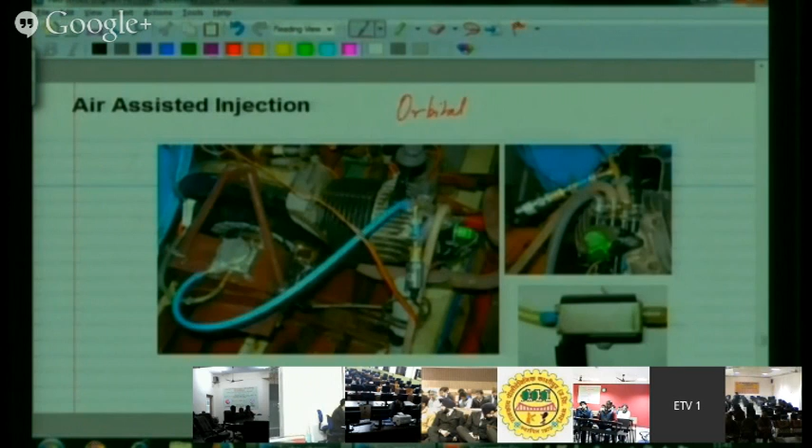I'll just explain this system. This shows the photograph of one such system, which is called the orbital system, actually invented by or developed by Orbital. This system shows the small compressor here. There is a fuel injector here, electronically controlled. It is basically an air injector and fuel injector, and you have an oil pump supplying oil for lubrication at the right level.

So the principle is shown here for the injector. You have compressed air coming into a cavity. The compressor compresses air into a small cavity, which may be 1 or 2 cc, very small. And you have fuel being put into this cavity by a fuel injector, so this cavity contains compressed air and fuel. Then you have a second injector, a secondary or second injector, which is a mixture control injector. So whenever you want this air and fuel to get into the cylinder, you open this mixture control injector and the blast of air and fuel will go inside.

So the sequence is: first you put compressed air, then fuel, or first fuel and then compressed air, but this fuel and compressed air will not get into the cylinder immediately. Whenever you want the injection to occur, you open this compressed air and fuel into the cylinder through the mixture injector. That's what you see here. So basically two injectors, one for fuel and one for mixture.

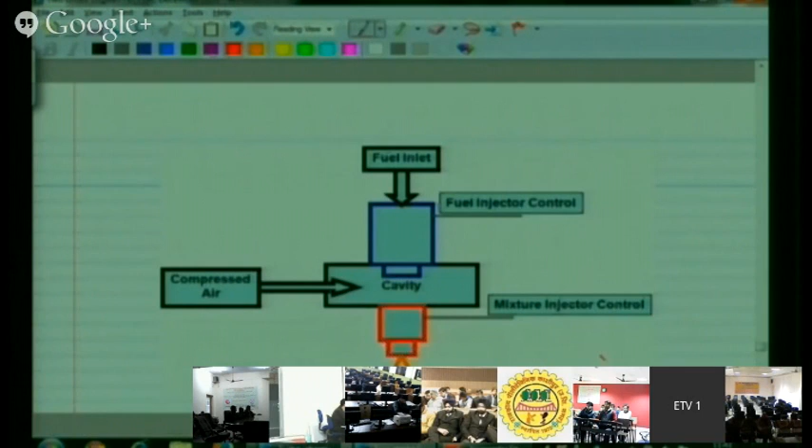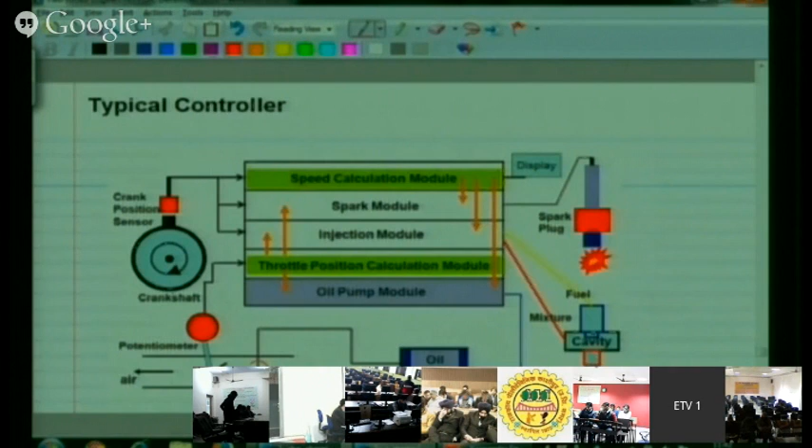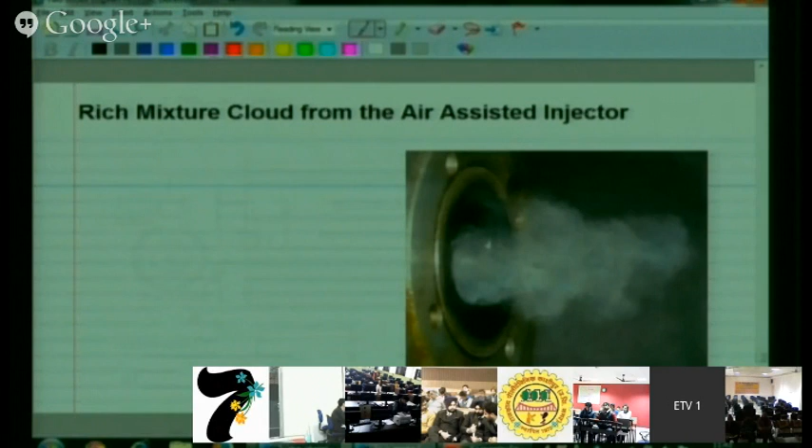And you see what sort of jet you get. It is not like a fuel spray. You get something like a cloud of air and fuel coming out of the injector. So it is almost prepared, and it only has to go and mix with the remaining air and form a combustible mixture. So this is what is called air injection, air assisted injection, a low cost, low pressure air assisted injection system.

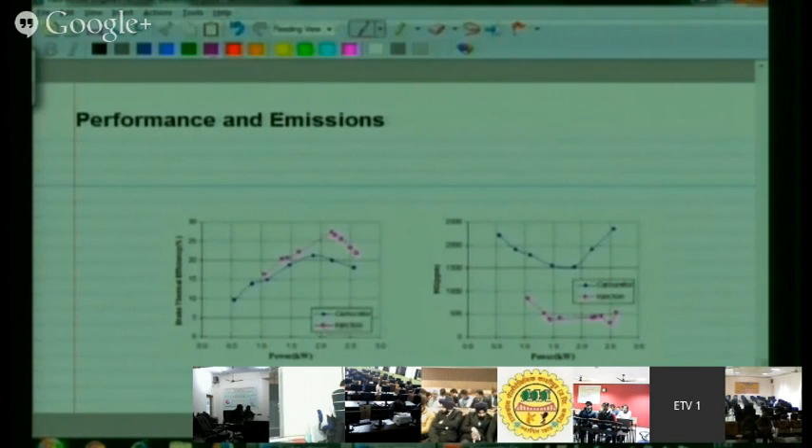So people are working with these kinds of systems. These systems are compact, but not very simple - they are complicated, but compact and very efficient, and can be used in certain applications now. This is another low cost direct injection system.

This is another kind of system developed at IIT Madras, which I've taken from the PhD work of Mr. Loganathan. You again have a small compressor, but this system does not use so much electronics. You take air from a small compressor, push it into a small mechanically operated injector, and the air from the compressor is timed using a compressor timing valve, which you can see here.

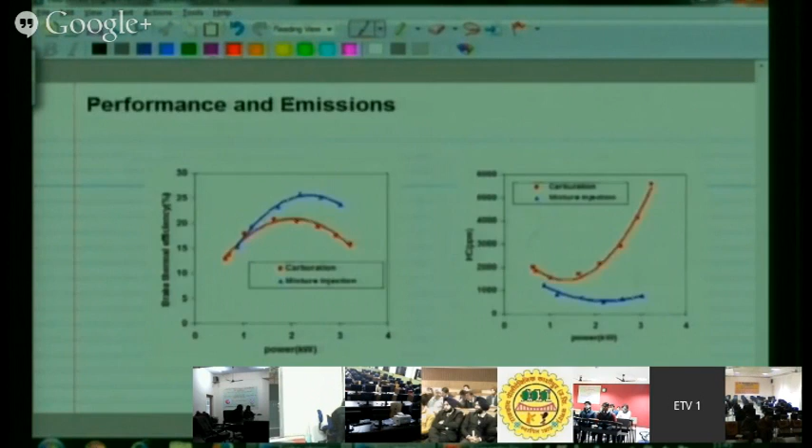Another method people are thinking of is cylinder barrel based injection. Here the injector is not located on the cylinder head, it is located on the cylinder barrel. In the previous case, the injector was located on the cylinder head, and when it's located there, the injector temperature goes up and its durability suffers. So here we don't locate it on the cylinder head, we locate it on the cylinder barrel.

As you can see, it is located somewhere out at this point, and this is also an air assisted injector. From the cylinder barrel we inject the fuel, only this time we inject it at such an angle that it goes close to the spark plug to form a mixture. The advantage is that even lower pressures can be used because it's not injected from the cylinder head, and the injector is not exposed to high temperatures and pressures, so it is more durable.

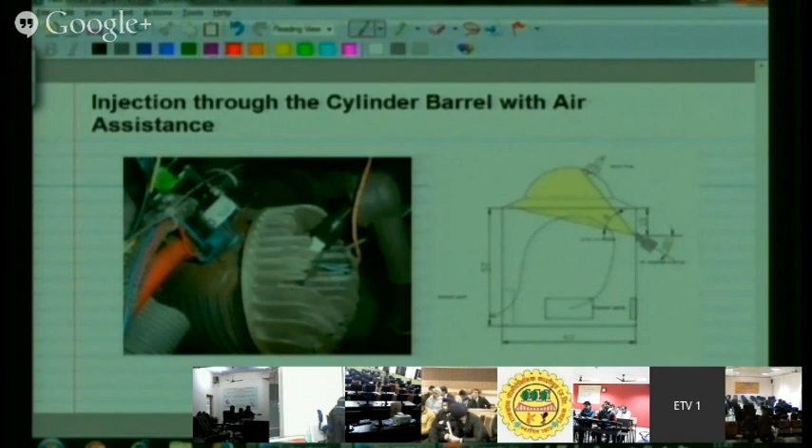In fact, if you observe closely, this injector body is made out of plastic, and this injector can sit on the cylinder barrel. Things have advanced so much that you can have an injector made of plastic and put it on the cylinder barrel of the engine, and it still withstands. This also gives good improvements in performance, and I can show the performance at full throttle.

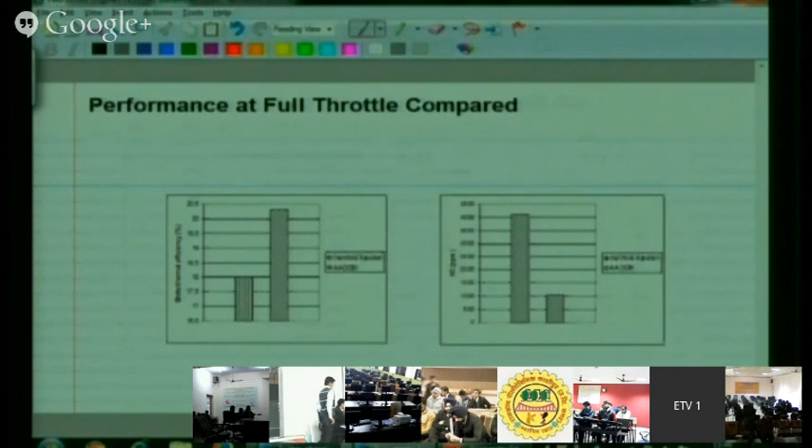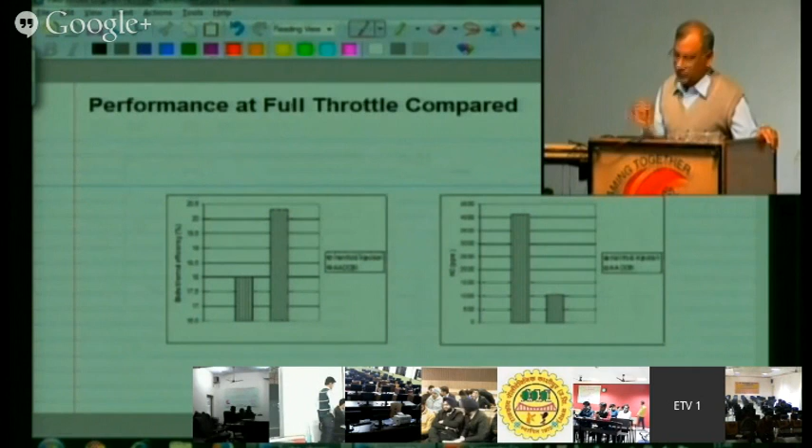You have an efficiency of about 18% for carburetion or even manifold injection, whereas efficiency is crossing 20% for cylinder barrel injection. Hydrocarbon emissions at full throttle have come down fourfold. All this is possible with fuel injection - cylinder injection, cylinder barrel injection, all these are feasible.

This brings us to the end of the lecture, as this is the time to move to another topic. We find that the two-stroke engine has inherent benefits and inherent problems, and people have found ways and means of improving it, but it is no longer a very simple two-stroke engine. We are willing to make it more complicated and make use of electronics and advances in fuel injection systems to improve the two-stroke engine.

One way is to resort to direct injection or cylinder barrel injection, and air-assisted cylinder barrel or air-assisted direct injection. These can give tremendous improvements in performance, and the two-stroke engine can go closer to four-stroke engine levels. Because of its compactness, it can in some applications even be more preferred compared to the four-stroke engine. With this, I would like to conclude this talk.